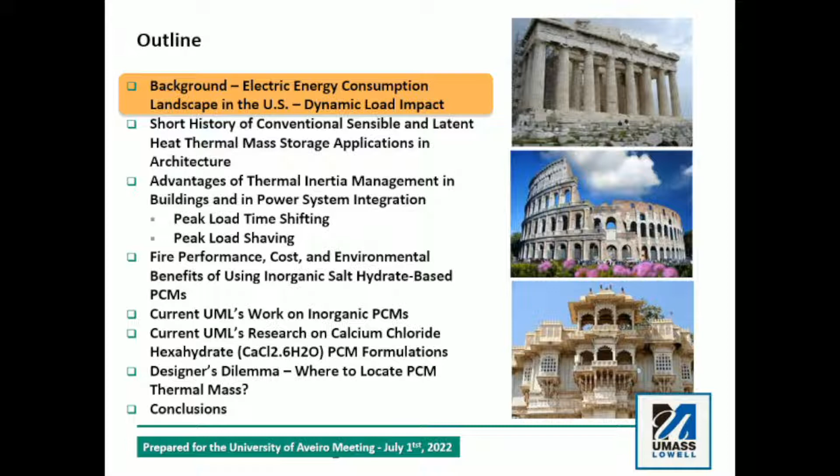Actually, I'll be ready for a couple of questions from you guys, and if somebody is online, we can also entertain questions.

So let's start with the first thing: energy situation in the United States. I don't want you to remember numbers because I'm using both units, imperial units and SI units, and sometimes it may be confusing, so even if I'm giving conversions, don't try to convert numbers, just try to remember proportions.

In North America, I'm talking US and Canada, buildings represent in general 40% plus, building-related construction work is about 6-7%. So we are very close to 50%, or half, of the actual energy consumption in the whole country is associated with buildings. We have industry representing 24%, transportation - lightweight transportation and heavy-duty transportation.

That means it's commercial transportation. Together they represent about 27%. So that's the general portfolio in the United States. Now we have two sectors within buildings: residential building sector and commercial building sector. Residential building sector is about 55%, close to 60%. Commercial building sector is smaller.

If you look right now at the types of energy consumption in the residential sector, you will see that the major component, among several components, is space heating. Then we have water heating, space cooling, and several other small things. And there are others.

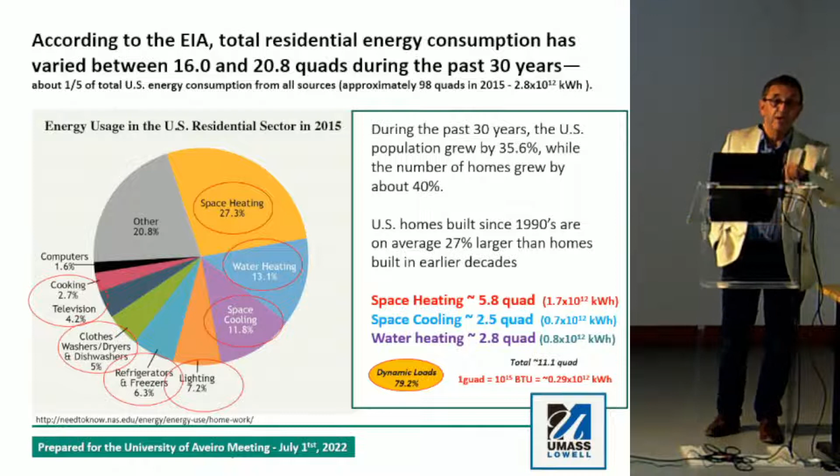If we go to commercial buildings, the picture looks very much similar. We have space heating being the largest one, of course not in Portugal, that's why I said it's a different situation - we're talking about northern countries. And if we go together, we can see that actually dynamic loads are even higher, 87%.

So we have those loads which can be regulated in many ways by thermal mass. Here's another chart showing how loads changed. You can look at that bottom chart, you can see how actually energy consumption, different types of loads, changed between 2003 and 2012. So this is that chart.

You can see that some of them grew up, some of them decreased. For example, space heating was significantly reduced, lighting was significantly reduced, because we came to a new generation of lighting. But some of them, like cooking, cooling, computing power, refrigeration, increased.

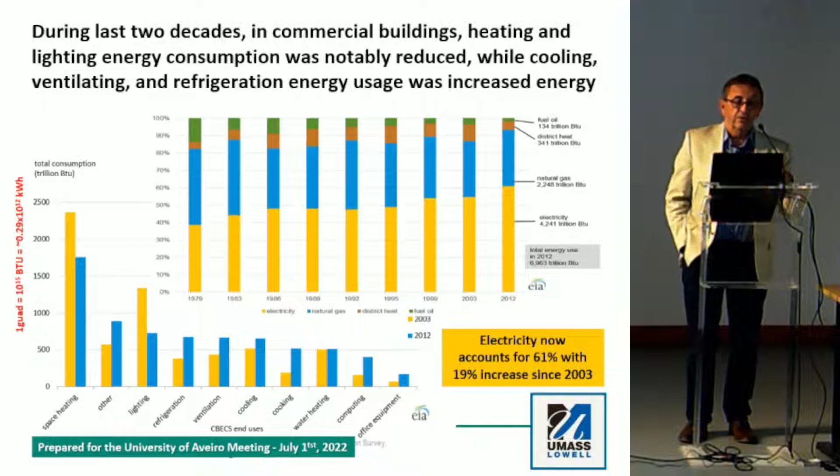So we can see that everything is going up and down, but the biggest loads are going down. Then the top chart is showing the distribution of different sources of energy. The yellow part represents electricity. We can see that it has been growing slowly, but right now we have a very rapid increase because all countries in Europe and North America are looking for electrification. So we will be trying to reduce, for example, gas consumption, coal consumption, other sources of energy through electrification.

But you have to remember, if we go back to the previous chart, the whole renewable energy resources right now are 4 times lower than the dynamic part of energy consumption in buildings. That's the major dynamic part. So this is very important to remember, how big the potential dynamic components in buildings are.

Let's talk about a little bit of history about sensible and latent heat usage in thermal storage in buildings, and why we are using that heat storage. So historically, in the past, it was to provide minimum comfort. We tried to live in just the minimum level of acceptable thermal conditions. Then, when BASF introduced Micronal, people started to talk about PCMs. When in the US people started to do passive solar heating and cooling, we started to talk about energy savings. So that was the second target for the application.

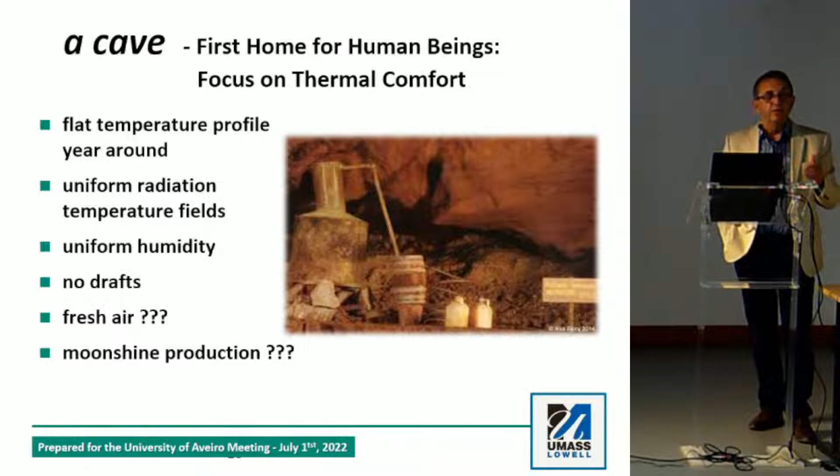And every country has building standards. I've been involved in creating building standards in many different countries around the world. This is something to remember: those standards do not necessarily represent human beings. They represent energy conservation. They represent construction requirements. They represent safety. But when it comes to the question of how human beings will live in those buildings, that question is not necessarily always answered.

And actually, there is an attempt to answer, for example, for average temperature in different rooms, or humidity level, or CO2 emission limits. So there are some attempts.

Okay, so let's talk about thermal mass. A couple examples of completely different technologies in different climatic parts of the world, where people have been using thermal mass. Historically, if we look at the top, we see in ancient times people used a lot of stone in Europe, and also in Asia and Africa people have used a lot of clay structures. And in northern countries, people use solid wood, which works at the same time as insulation and also thermal mass.

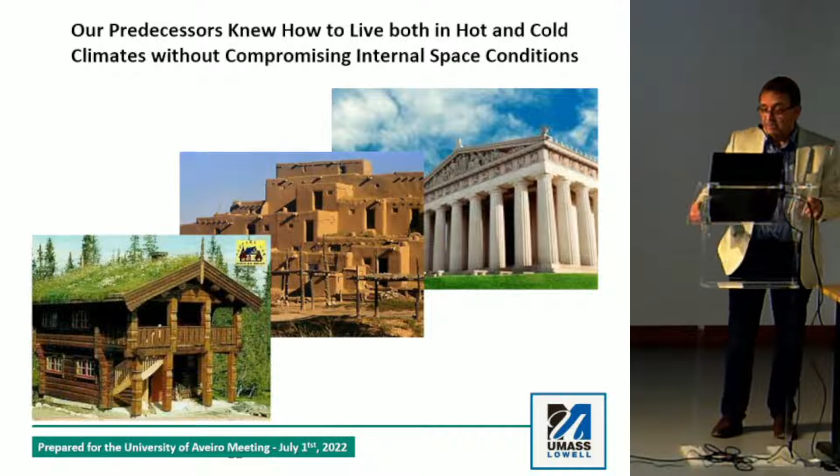Important just to remember the scale, how significant the capabilities of thermal mass in buildings are. I just took the Empire State Building, and I did calculations considering how much structural mass is involved in the building. And I don't want you to remember numbers, just one number. If we assume that all calculations are made for 5 degrees delta T, the Empire State Building is equivalent to 26,400 Tesla Powerwall batteries.

And ask yourself a question right now, how many buildings like this do we have in the United States? How many buildings like this do we have in Europe? This is the huge potential. And ask yourself, is there any company around the world which can produce that amount of batteries to store energy? No way. We don't even have enough lithium around the world. So it's good to realize how big the potential is in good engineering and good management of thermal mass in buildings.

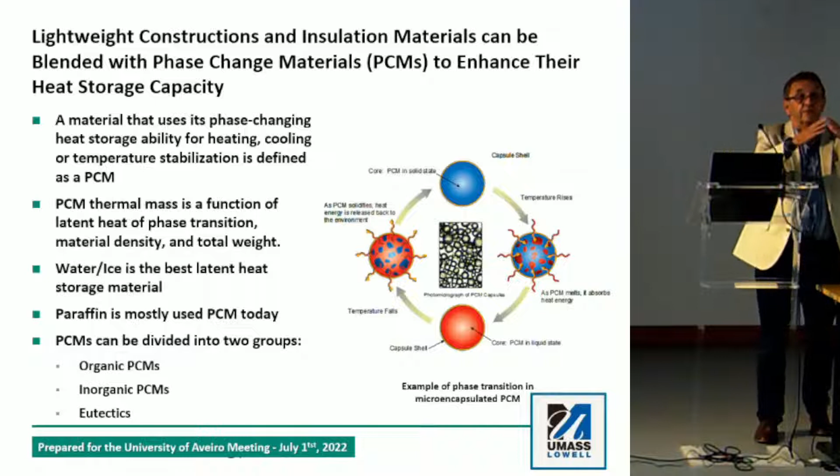In that house, depending on how much thermal mass we have added in phase change materials, we can have a situation that at 10 o'clock, we still don't feel anything. 11 o'clock, we still don't have anything. 12 o'clock, we still don't have anything. The temperature is just as it used to be, 30 degrees, our phase change temperature. For me, normal practice is that system designs like this can easily provide a 4-hour delay in time.

So you can see how big and powerful a technology it is, and you can see how important the technology could be for Portugal. You have a wonderful climate here, with loads going up and down, and temperatures going up and down, and also with loads not going extremely high or extremely low.

So you can use this almost for the entire year, especially, I would say, eliminating heating loads during the winter. Okay, so this is what we talk about PCMs. There are several types of PCM. Water-ice phase change process is the easiest and best recognized by everybody, but we have 3 groups of PCMs. Inorganic PCMs, like salt hydrates. Organic PCMs, waxes and paraffins are a good example, but there are many, many different organic PCMs. And eutectic, different mixtures of the different types of phase change materials.

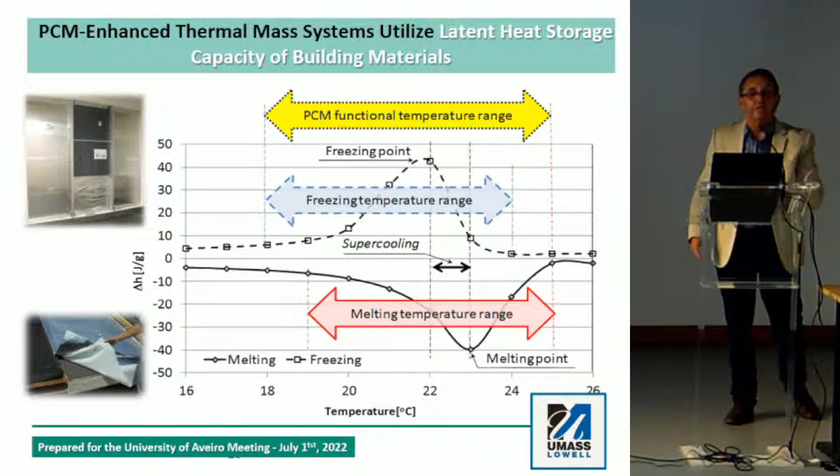Okay, first PCM house. Have you noticed? People have known PCM houses around the world for centuries. The first successful application, not only PCM, but also PCM-enhanced thermal insulation. Beautiful, the best solution for housing in northern climates. This is really the first time people used PCM in architecture. Maria Telkes, in Dover, Massachusetts, in the 1940s, built a house. She was a chemist. And before she started building that house, she checked climate data from Massachusetts.

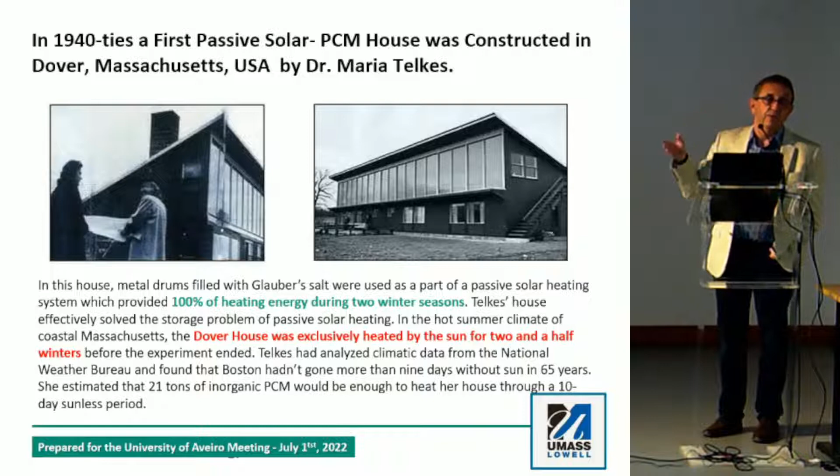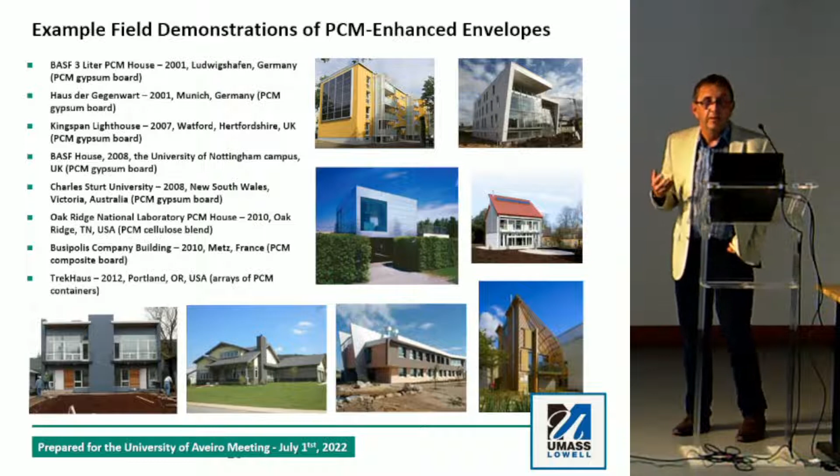I gave a couple examples of the systems using PCM technologies. So there are successful demonstrations. You can see, I think 1, 2, 3, 4, 5, 6. There are applications around the world, Germany, UK. This is the BASF building in Ludwigshafen. This building is a metal structure in France.

This is a German building, one of the first best known German buildings in Munich. This is, I think, the University of Nottingham, lighthouse by Kingspan, also in UK. This is a building built in Australia, PCM. All those buildings are BASF Micronal. And this is the first one.

This is one of my buildings, the first of my buildings, where we can see application of different microencapsulated PCM. And here in this building there is application of cellulose insulation mixed with PCM. Here is the application in the state of Oregon, also PCM provided by Bio PCM, North Carolina PCM.

So let's talk about advantages of thermal inertia management in buildings and in power systems. So historically, we use thermal mass to stabilize interior space temperature, improve thermal comfort. That's mostly comfort-related application. Now, today, there's a different function related with thermal load management, and we're talking about, of course, summer loads, cooling load, and heating loads during the winter time.

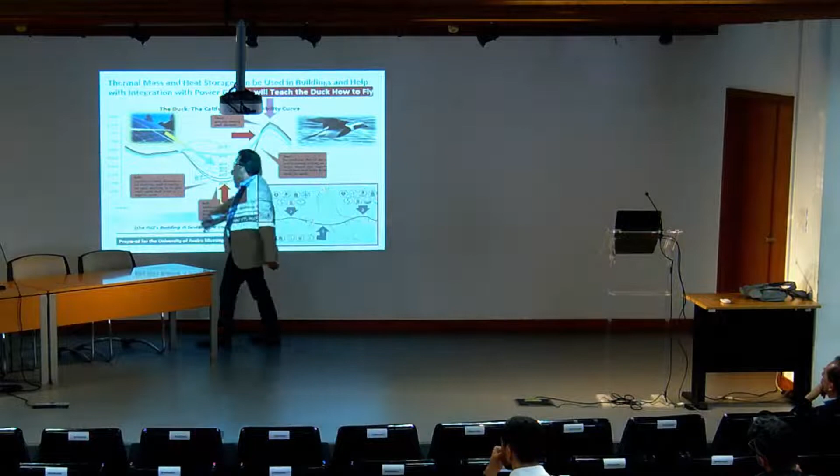This is how everything's starting to look like. And actually, we call this in the US the duck chart. And in most civilized countries, that duck chart looks very much the same. This is energy consumption along the day by the building sector. For residential buildings or commercial buildings, it can be a little bit different, but not necessarily much different. And you can see that it looks like a duck, yes, a sitting duck.

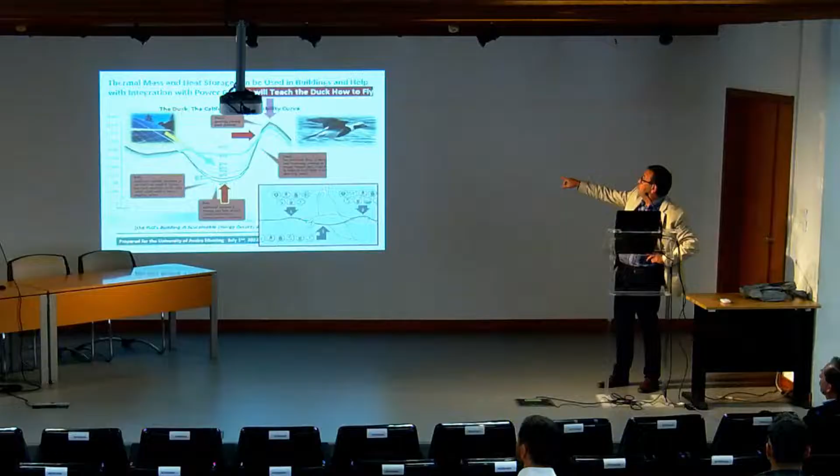Now, if you see that light blue line going, this is a typical building. We have two peaks, early morning peak, about 7 o'clock, 8 o'clock, a little bit of energy consumption coming up. And then we have continuous energy draw by the building sector, and then we have a huge peak in the afternoon hours, correct? This is important to remember, that actually if we get to that peak solar part, we have negative energy, yes, going to the grid. So we have that belly growing. More solar, we have that belly growing.

And we are getting to the point that actually we have to start shutting down power plants. You know, you cannot shut a power plant because power plants are designed for specific capacity. And if you shut down power plants, it takes sometimes a week or two to make sure that you will be able to put this back in operation. So in that situation, you have to make sure that that belly is as small as possible, correct?

The second information you need to know is that actually the optimum situation in load distribution will be that flying duck. You see how loads are looking? All that chart is very much flattened. It can be achieved just by superposition of several effects, and one of the effects is energy efficiency. So energy efficiency just reduces all those parts a little bit.

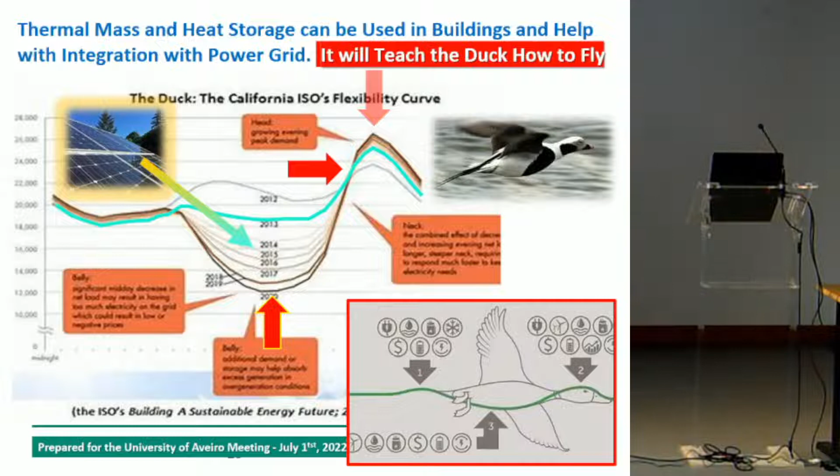If that balance is not operational, manageable, the country can actually, especially with coming loads, we imagine there is a prediction that now the peak loads for buildings can be a couple hundred percent higher. And we will need to find the way to react to those loads. It is not easy to add that much capacity of power production or power transmission in any country. It will have to be a worldwide revolution, building power plants everywhere and building transmission lines.

It will never happen. So if we stay where we are right now with current understanding of thermal mass, thermal management, and energy dynamic management, we will end up in a situation that that part will be eliminated. What does it mean? Solar power will not be able to demonstrate its capability, use its capability. And what does it mean? That we still will depend more and more on the conventional sources of energy. So the only way to move on from coal, oil, gas to a new generation of energy is to understand those processes and to make those processes manageable.

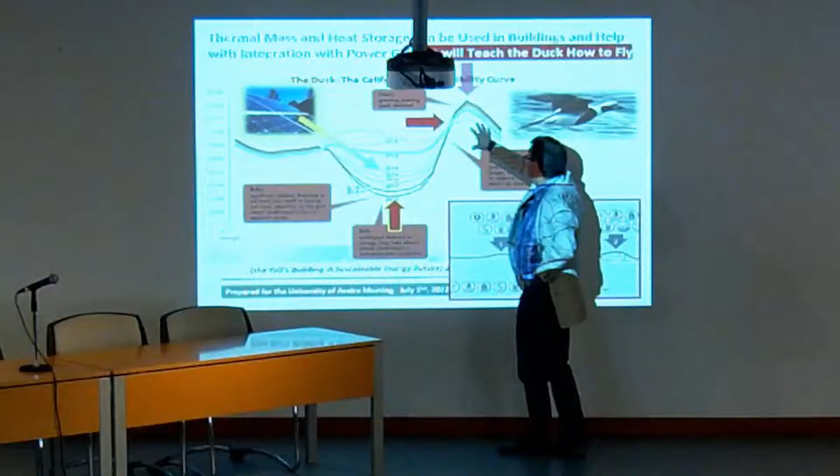This is like opening the door. This is the just condition. People don't understand. We can build a lot of plants, but still we will have those peak loads. And we are not able to build the power generation and power transmission industry to the point that we'll be able to supply a couple hundred percent larger peak loads.

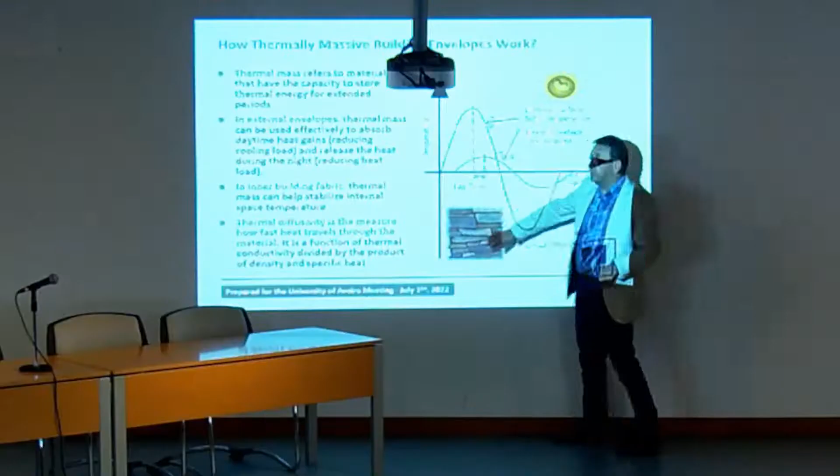Okay, let's go to the thermal mass. How thermal mass works in buildings, just to make sure that we have tools to operate that whole system. If we have daily thermal energy, this is thermal excitation coming to the building mostly from the sun and temperature swings. That excitation is usually transmitted through the building envelope, through the roof, through the walls, and depends on how much thermal mass we have in the wall. That whole transmitted line can look completely different. We call this thermal damping, and we call this thermal lag.

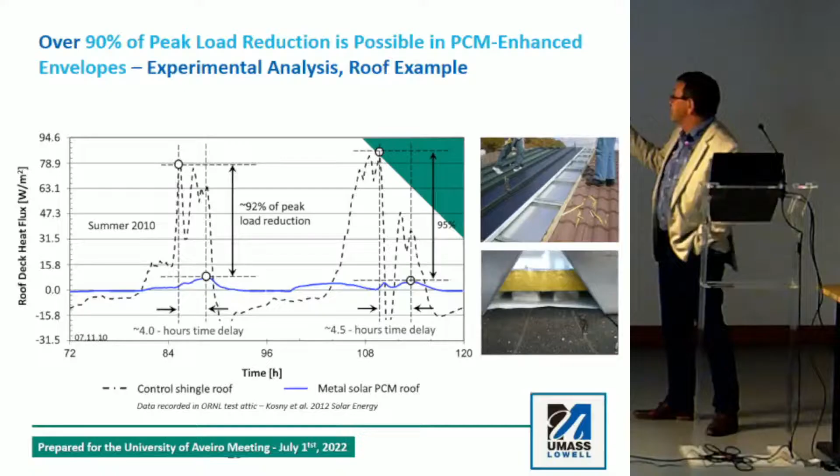That means that the peak we can see on the internal side of the external wall is at a different time than this peak, which is on the external wall. And we can see that actually there's a significant reduction in amplitude. This is an example of how it can be manageable. And this is one of my experiments. Some of you can recognize PCM used here. This is the roof, conventional roof. You can see that line here.

This is the temperature underneath the roof. And actually this is the heat flux under the roof. And this is the heat flux under the PCM roof, advanced roof. You have a conventional roof, the same R-value, the same thermal properties. The same roofs follow standard requirements. Everything is the same except that the other roof has a special dynamic design. Load has been reduced 92%. Peak load, actually, at this moment is 95, but total load is reduced about 60–70%.

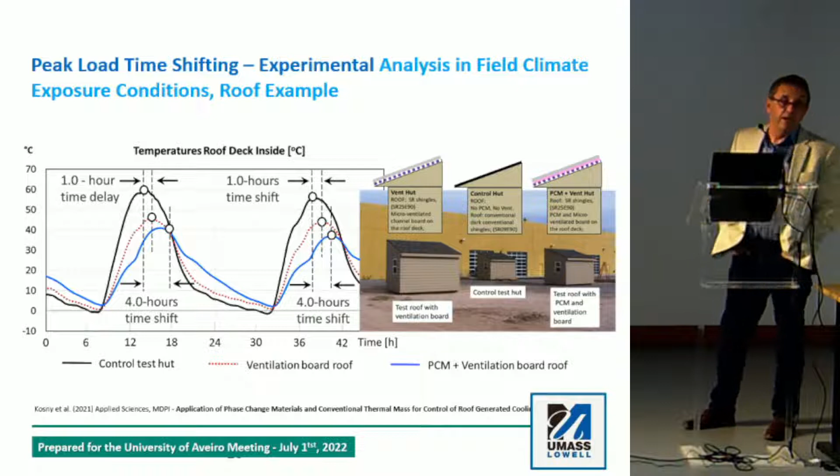Another example. This is something I should actually show to our colleagues from Saint-Gobain. This is one of the systems which I designed for Saint-Gobain. And we have three roofs.

Conventional roof, roof with special thermal break system with ventilation cavity, and the roof with PCM system. You can see that you can achieve a lot with no PCM design. This is the reduction of the peak. This is the PCM extra part.

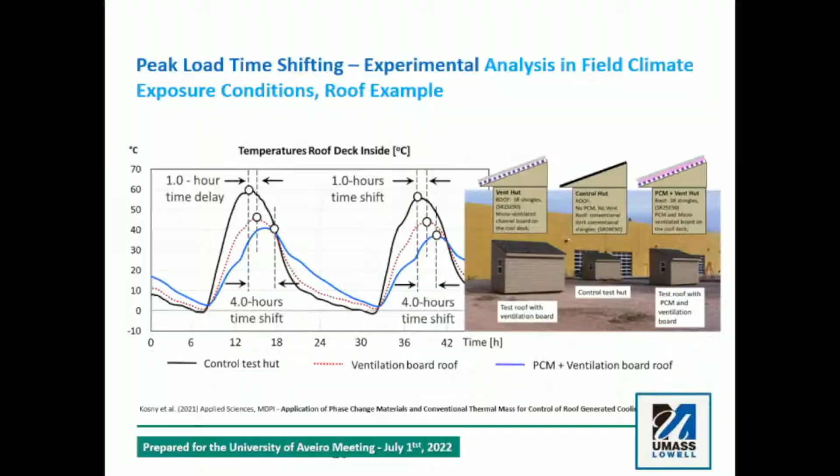And with PCM you can get this very important information: shift in time. I would like you to remember, with envelope, shifting in time four hours is something which should be called achievable. I can achieve also 8 hours, I can even go over 8 hours. But this is something which is achievable. And you can achieve this in walls, you can achieve this in roof.

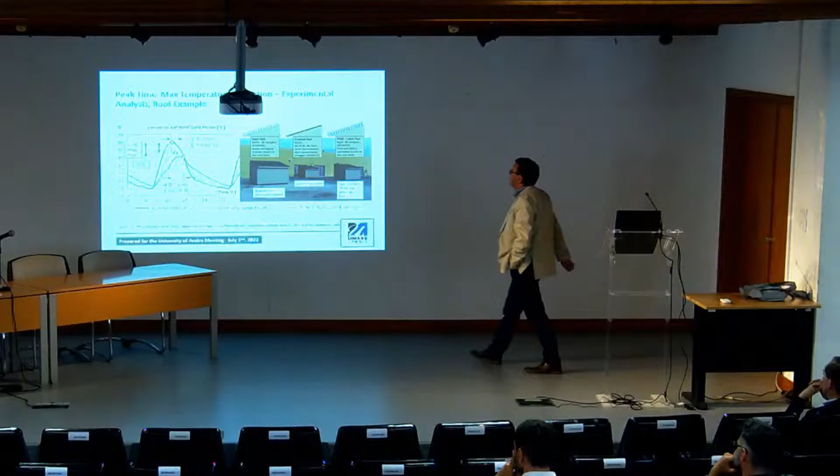This is another example, and we talk about time delay. It's another shift and temperature reduction. You can see how different the temperature is in those roofs. Here it's about 60 degrees Celsius, and the PCM roof has 40 degrees Celsius, so it's about 20 degrees reduction.

Imagine in your houses, you live on the 4th floor, on top of you there is a roof insulation, and it's very unpleasant living there during some days. I know this because that was my college time, I lived in the dormitory on the 4th floor. Summer was not a pleasant time.

So you can reduce this time. This is something I'm just appealing to you guys as engineers. You don't have to remember those designs. I would like to make sure that you keep in mind that this is doable. That's all, you will figure out a better way. I'm just giving a couple examples.

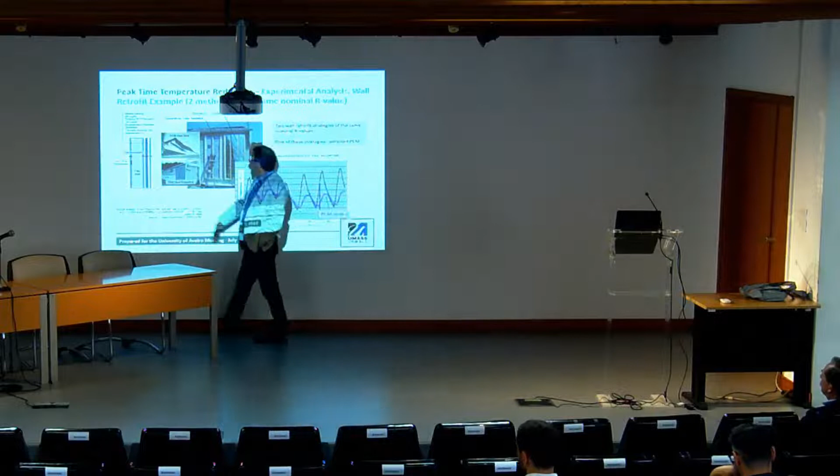This is the tricky thing for wall insulation. That system has been designed for Florida, for just concrete masonry wall. So this is just part of the masonry wall here, CMU wall. Nothing different than you guys have here.

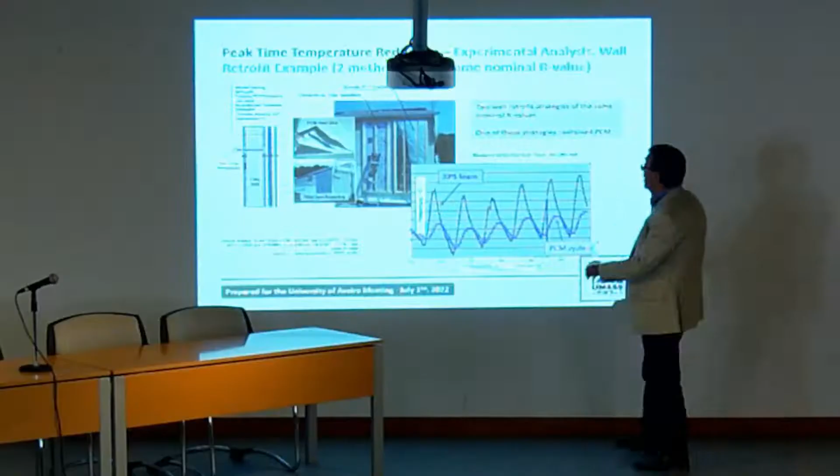And then on top of this, we designed two systems. This is a typical system using plastic foam insulation, which people have been using everywhere. And this is a system using phase change material with some kind of different tricky configuration, where both systems have the same R value, so I was adding the same amount of material to the wall. Cost was comparable. Believe me, this is nothing fancy, not like a spaceship material.

Everything is just almost everyday usage. Actually, here we use PCM which has been used by one of the companies for clothing. I didn't have different other sources, and I needed several temperature ranges, so we used that material. And you know what happened?

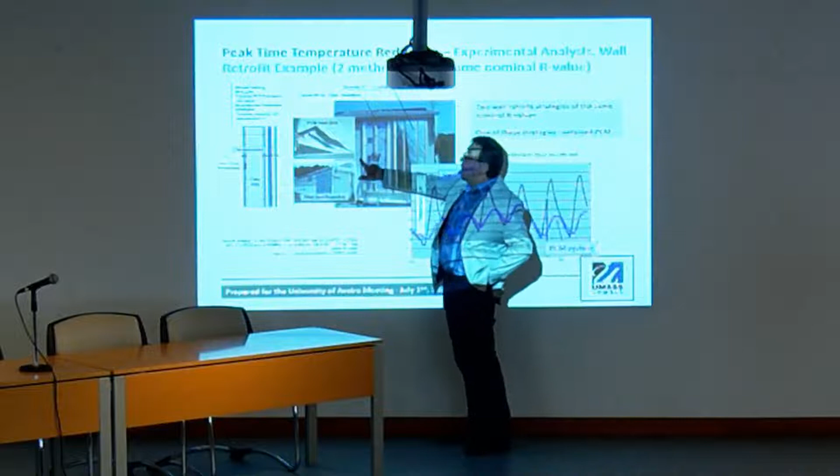We measured temperature on the concrete behind the insulation in both cases. This is the temperature of the conventional part of the wall, and this is the temperature on the PCM insulation. You can ask yourself how big the difference is, and it is very significant. This is like 70... let's see, 76 to, I think it's 70, 80, 90. So it's about 15 degrees.

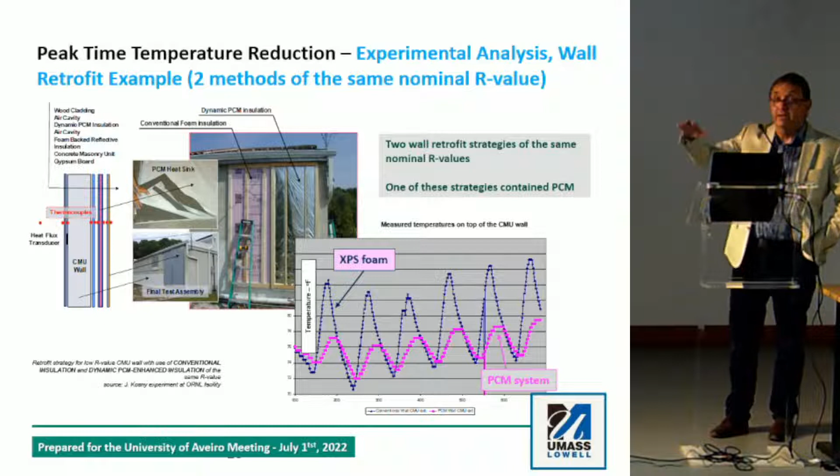Again, it's achievable, that part of advanced thermal insulation is achievable. And this is great, I'm showing this for you guys because you have a different climate than what I have in Florida. In Florida, temperature is sitting during the summer very much at one point. You guys have temperature going up and down, wonderful for using phase change materials and thermal mass.

Okay, so let's move on. We did a lot of experiments, but we also did a lot of calculations. This is one of the examples of calculations. You can see that you can consider, let's assume that this is a sol-air temperature.

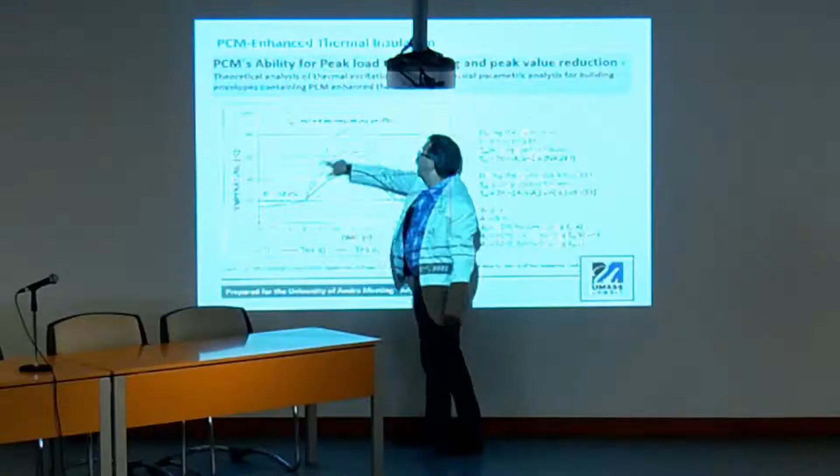You know what sol-air temperature is, when you add the component coming from air temperature and solar temperature. We created that sol-air temperature that represents external temperature of the wall under the sun. So you may have an extreme sun situation, quite a big peak during the day, or not so big a peak. So we did 3 scenarios during the day, showing the temperature of the wall during the day.

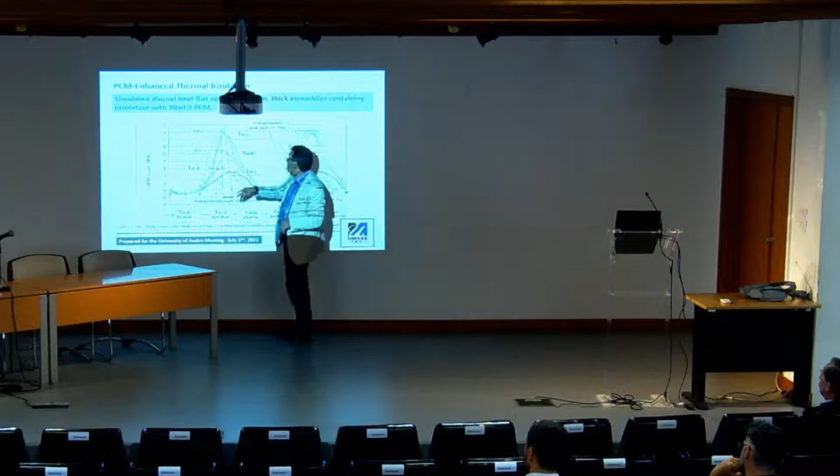We have here an example of 3 types of insulation, all of them 14 centimeters thick at the level of insulation, mixed with PCM, considering 30% of microencapsulated PCM. So this is fiber insulation, could be fiberglass, could be cellulose, could be something else, mixed, or can be foam, mixed with 30% of the PCM. Then that dotted line represents a scenario, this is the largest peak, that orange is just the medium peak what you saw in the previous slide, and this is the small peak.

You could see that we have a significant shift in time. The solid line represents the scenario when we use PCM, the dotted line is no PCM, just insulation. So you have non-PCM, PCM, non-PCM, PCM, non-PCM, PCM. Do you understand this chart right now? Each scenario on those excitations is represented with two parts of the configuration.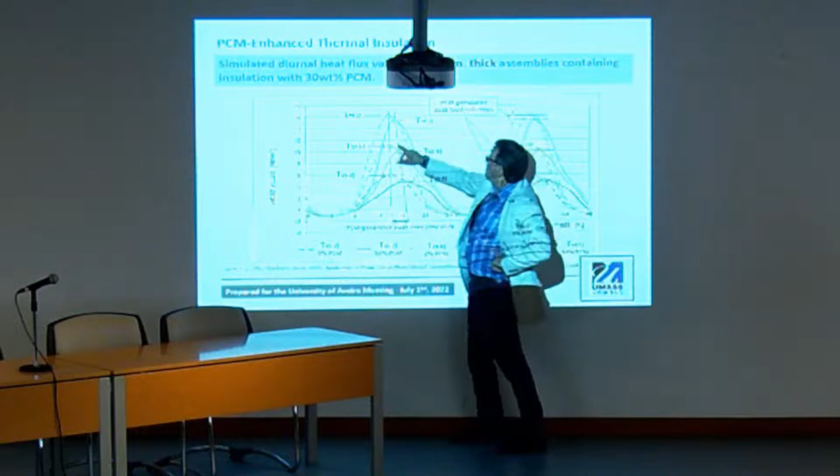You can see that in each part there is a significant shift in time, and significant reduction. With higher excitation, you have higher temperature increase with a lower thermal effect—simply you don't have enough PCM. So you will have to add PCM, and you will see this on the next chart. But if you have lower thermal excitation, you have a more significant effect.

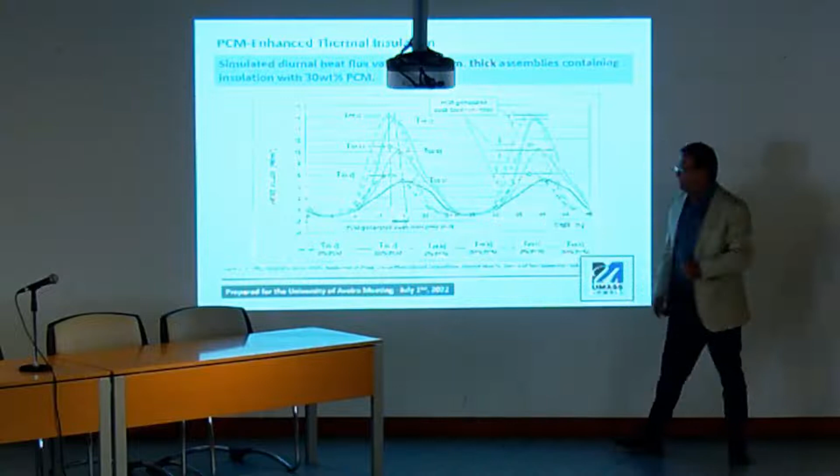So this is for something which is 14 centimeters thick. This one is 30 centimeters thick, for roofing insulation. You could see that the impact is much more significant—impact showing how big it is. Here is material without PCM, material with PCM. We have significant reduction of the load and significant time shifting.

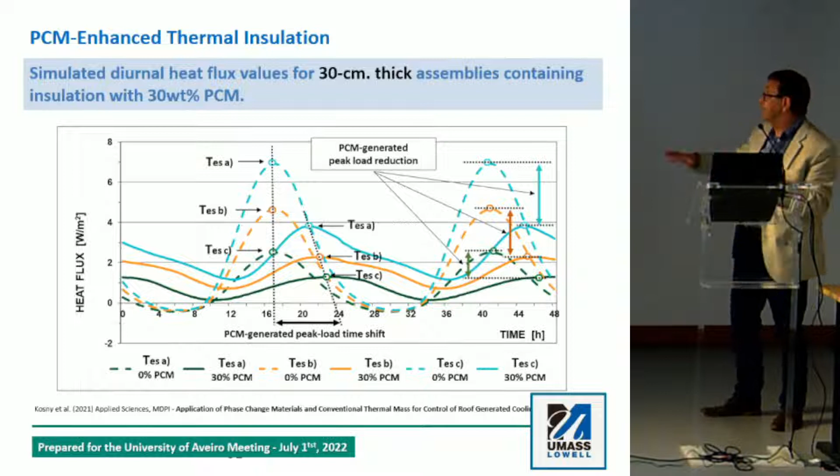It's good to remember that I have a lot of colleagues who say that phase change material has to be associated with a highly conductive environment, just to provide rapid accumulation of heat. That's correct—I call these fast systems. You need those fast systems in electronics, in some building applications, in military, batteries, automobiles. But in buildings, when we're trying to manipulate peak load times, we need slow systems. That's why people don't understand that if you add insulation with thermal mass, you create an extremely slow system. You'll see how slow on the next chart.

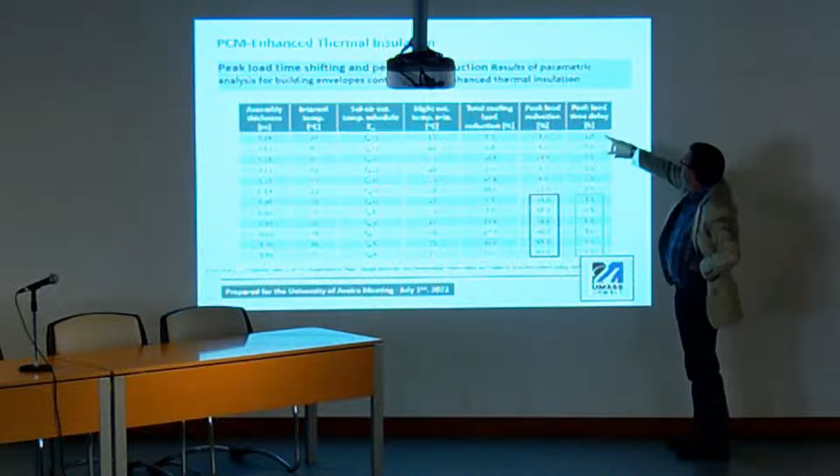I put just those peak loads for the 14 centimeter system and 30 centimeter system, and marked those numbers—this is peak load reduction percentage and peak time delay. You can see that easily you can go 3 hours, 6 hours, 6.5 hours of time shift, so it's doable. The only thing you need is enough insulation capability and enough PCM, enough thermal storage—those are the two important things in design. If you have enough, thickness is just a function of how insulated the material is, so you may have super insulation which will be much thinner.

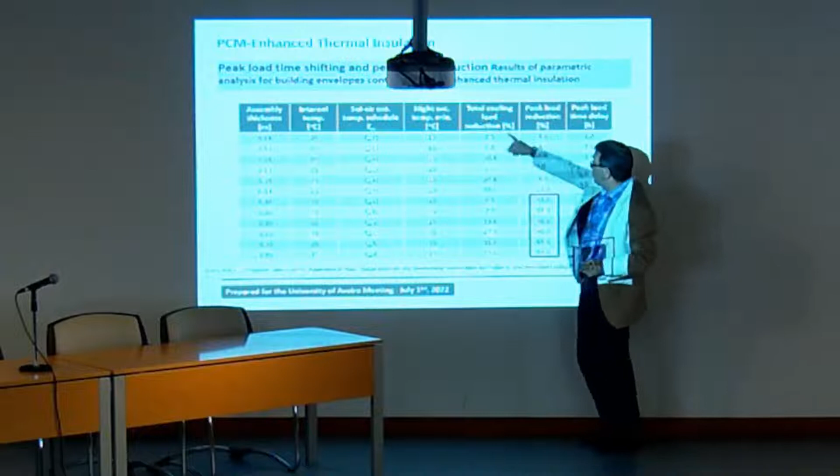When it comes to total load reduction, you can see that for these systems you can reach even 70%. I would say it's safer to say 30% load reduction in general.

Fire performance, cost, environmental benefit, and some other benefits of using inorganic material versus organic material. First, it's almost impossible to ignite salt hydrates, so that's good to remember—most inorganic materials are very difficult to ignite.

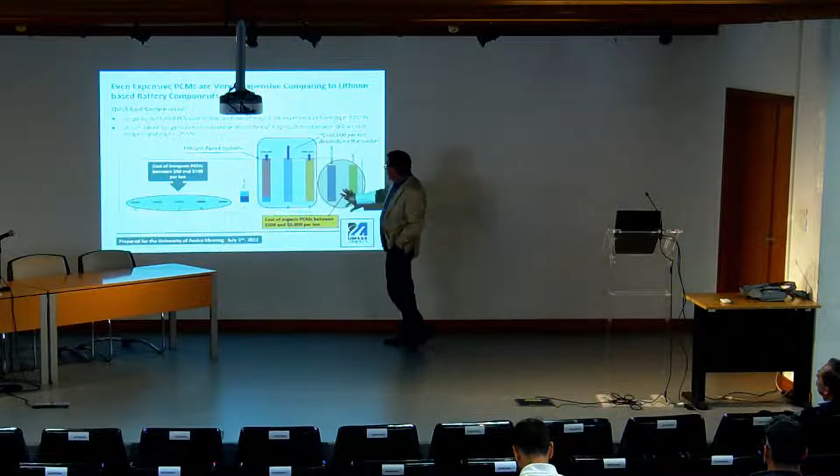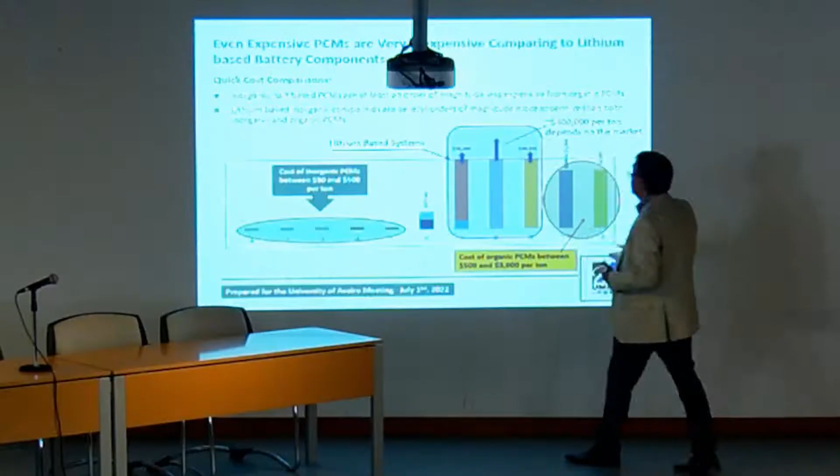That's the first example—actually the second advantage after fire. I tried to put this on a scale: these are the inorganic salt hydrate-based PCMs here, you barely see them. These are organic PCMs, you can see them better. And this is the whole cost of the lithium-based PCMs—I put three formulations of different types of lithium-based PCMs. You see how big the scale is.

I would like to talk a little bit about lithium. The cost per ton for getting lithium compounds is about $20,000 per ton, and this is not today's price, it was priced from 2 years ago. The price is moving very fast. International assumption is that the cost of energy stored in lithium-based systems is about $273 per kilowatt hour, accepted internationally based on one of the United Nations programs research.

Here we have the US DOE price target ceiling for PCMs, and this target is $15 per kilowatt hour, for general PCMs, organic and inorganic, versus $270. That's the difference in prices.

Now remember about the lithium thing. It takes about 1,900 tons of water to extract lithium compounds. We're talking about Chile, Bolivia, and those countries being converted into deserts, salty deserts, because when we produce lithium we also produce tons of brine, which is drying. So we take water from whole resources around, and those countries are already scarce in water. This is good to remember.

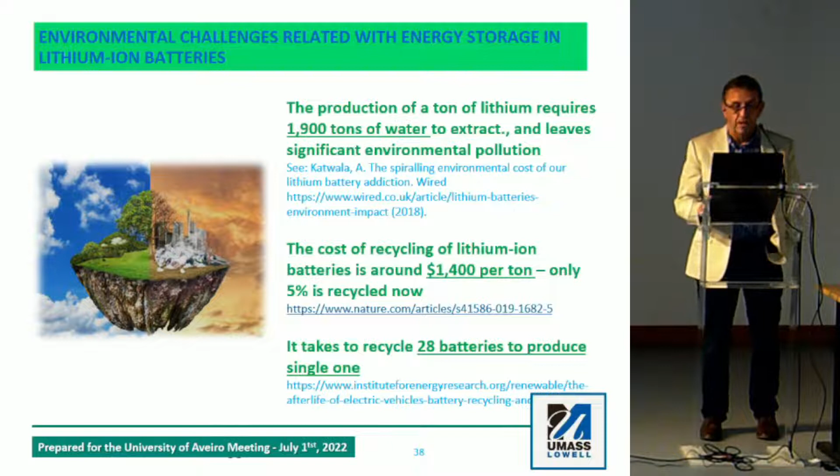Another thing is, when somebody says okay, we can recycle all the batteries to get lithium - yes we can do this, but it takes 28 batteries to recycle into one. So that's the reality, and that's the compatibility.

And if you remember that Empire State Building which I showed before, this should show the capability of how much we can help the environment.

Another one, recyclability. It takes about 60 cents or $25 per ton to recycle different types of concrete structures - that's US, this is California type of evaluation. Then it takes $24 per ton to recycle building waste, so if you crush a building, demolish a building, you take this and recycle it, it takes about $24 per ton. If we take PCMs, wood is also about $24 per ton. If we take paraffinic PCMs, the only thing is you need to take it and convert it into new products, so there's almost no cost for recovery, just cost for producing the new product.

If we take lithium chemicals, it's about $1,000 to $2,000 per ton for recycling. When it comes to batteries, some countries are talking about having programs already for recycling batteries. I think about 5% of batteries worldwide are being recycled right now, and most countries are saying openly that so far that process is uneconomical. So there is no economic justification to make businesses based on recycling - everything has to go under some kind of donation, some kind of subsidies.

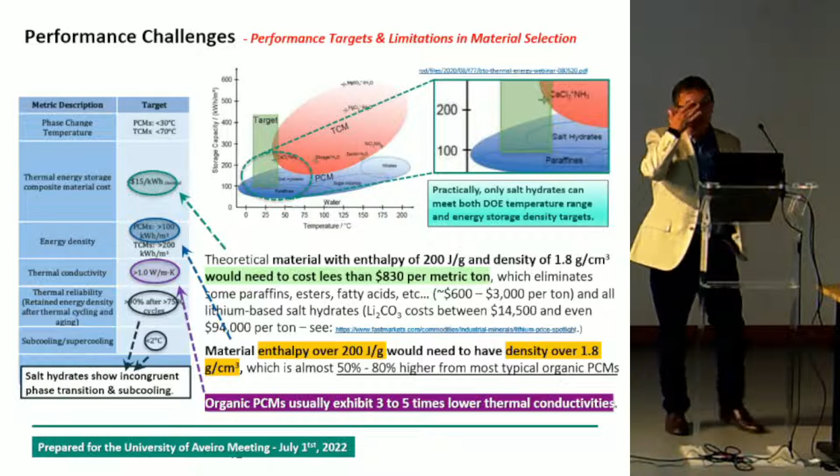Here's a couple of slides I put together just for you, to realize what are the requirements for PCM and how difficult it is to meet some requirements with organic PCMs. First one is price, $15 per kilowatt hour - it eliminates everything which is of higher cost or lower density. Then the second, energy density - we talk about 100 kilowatt hours per cubic meter, so it's a volumetric energy density.

Then thermal conductivity of material, about 1 watt per meter Kelvin. It's good to realize that most inorganic PCMs' conductivity is 1.2 to 1.4, 1.5. Organic PCMs are 0.2, so they are 4 or 5 times less conductive.

Then an important fact is thermal durability - that means we need a number of cycles, freezing, thawing, freezing, thawing, without losing enthalpy. Organic PCMs are much better here, they can do millions of cycles without losing capability.

Another thing is subcooling, which is supposed to be at least below 2 degrees. I have colleagues from industry telling me they will never produce material with subcooling higher than 1 degree. Some people working here with different inorganic PCMs say they never saw subcooling so low for inorganic PCMs produced by one of the European manufacturers. I agree, and if you put those numbers together, you will see it's extremely difficult to meet that criteria with organic PCMs.

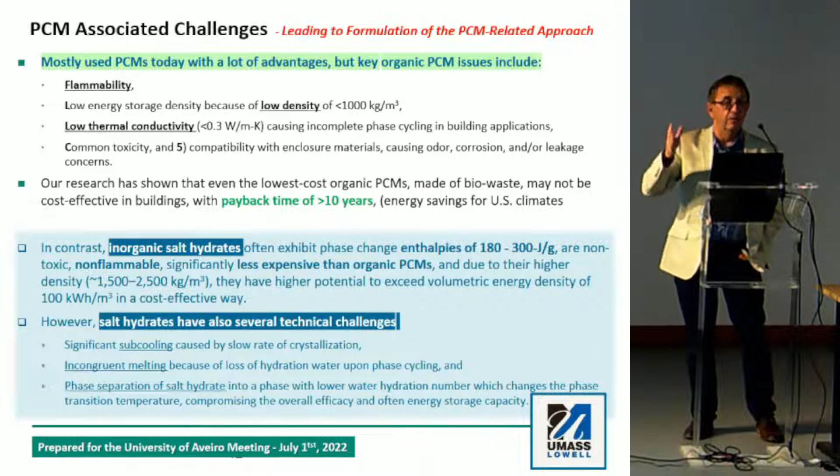Now, I would like to follow on this difference between organic and inorganic PCMs, and I have on top organic PCMs. So organic PCMs are extremely good when it comes to durability. They can work and work. They don't have issues with subcooling, but they are flammable. People are saying, okay, they're not flammable, we can put fire retardant. Yes, but fire retardancy is not that easy to do, and actually China is a very good example.

If you add fire retardancy, during the fire situation you don't have much of the fire, you don't have ignition, but you will have a lot of smoke. And people are not killed in fires by the flame. People are killed in fires by just breathing the smoke.

That's major. And another one, thermal conductivity, too low thermal conductivity. So that material is difficult to use really in a serious way in buildings. And actually, this is explanation one. We have so many projects around the world, and so many proud architects who said, okay, I implemented PCM for the first time in Guyana somewhere, and then it happens that actually that material doesn't work.

And with inorganic materials, we have significantly higher energy density because we have material density like 2, sometimes 4, sometimes 5 times higher. And we have material of higher thermal conductivity. Major problem is that it is difficult to have good durability. And we have subcooling, incongruent melting process, and phase separation, which is a challenge for engineers, but I would like to show you in the next slides that it is achievable.

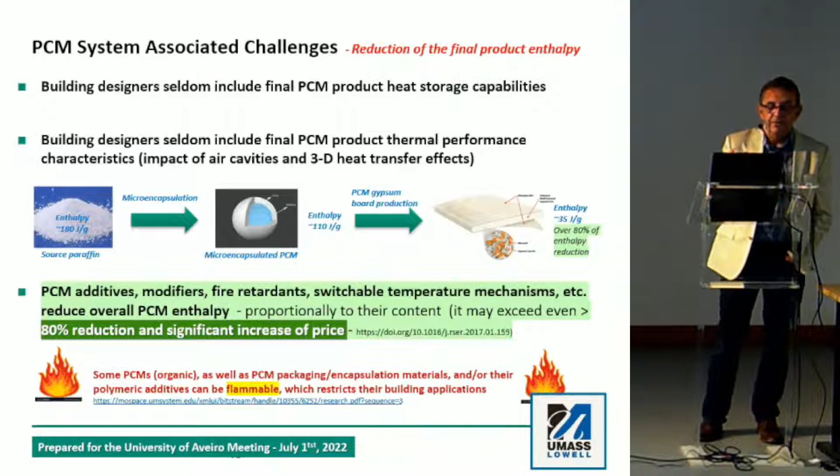And this is another important fact when it comes to designing PCMs, because a lot of people don't understand that the more we are adding to that PCM, the less enthalpy we will have at the end. So I gave an example with Micronal, with enthalpy about 180 joules per gram, which is paraffin. Then we convert this into microencapsulated material, and that conversion reduces enthalpy from 180 to 110. And then we try to use this material as a part of gypsum board or concrete or something else, and final enthalpy is about 35 per gram.

So if you add this to concrete, which has enough thermal storage capacity, you will not even see the effect of the addition of thermal mass. So this is good to realize, because some people may say, okay, PCM doesn't work in my concrete structure. How much do you add? 5%. Okay.

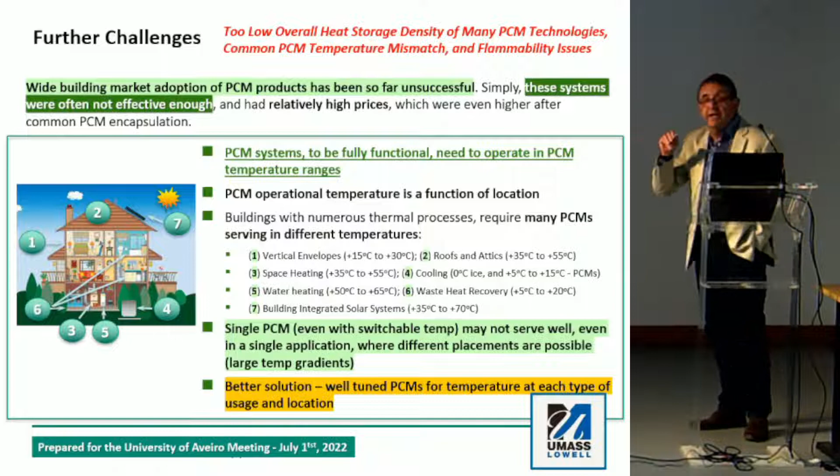And this is the first thing designers should know. Okay, I will place my PCM on the roof, so I need to know that roofs and attics require PCM of 35 degrees to 55 degrees. So this is what I should start looking for. Then we need to go to real engineering work. Take a computer model, design that whole system.

See what is the temperature fluctuation in this specific point, and then, if you remember my slide with those arrows, the temperature band, operational temperature for PCM, you need to put that operational temperature against the real temperature in that place. This should happen. I bet that happened in less than 10% of projects so far around the world. The other projects were just designed by a PCM strategy. And that's the explanation why so many projects are not working correctly around the world.

This chart is specifically dedicated to our approach in my team, and it comes from my several decades of experience working with PCMs. We are not working only on PCMs. We have a holistic approach. So this is the PCM part, but we also work on the system part. You will need different PCMs for different systems. So you need to combine that, and it has to include the formulation-related chemistry part and the durability part.

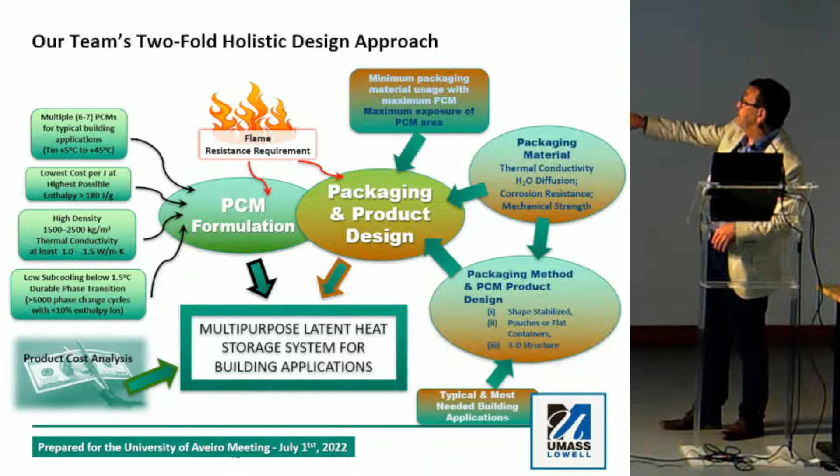Then you have to go to what we have on the bottom left side, cost analysis. Because if we design, and I'm talking to you as part of academia, those people who will be developing those formulations, industry will never adopt a system which will not go through a positive product cost analysis. You may have a wonderful system based on lithium compounds, and you will see that industry will say no, no, no.

So that's one thing. The second thing is that you have to design the system which will carry that PCM. And we have several strategies. We can shape-stabilize material, for example, foam mixed with polymeric material mixed with PCMs. We can have arrays of pouches or containers, or we can have three-dimensional structures. There are many different opportunities, but you have to remember, the system has to be designed to carry the PCM, not just a PCM. That alone is not a solution, and it is the first recipe for failure of the system in building design.

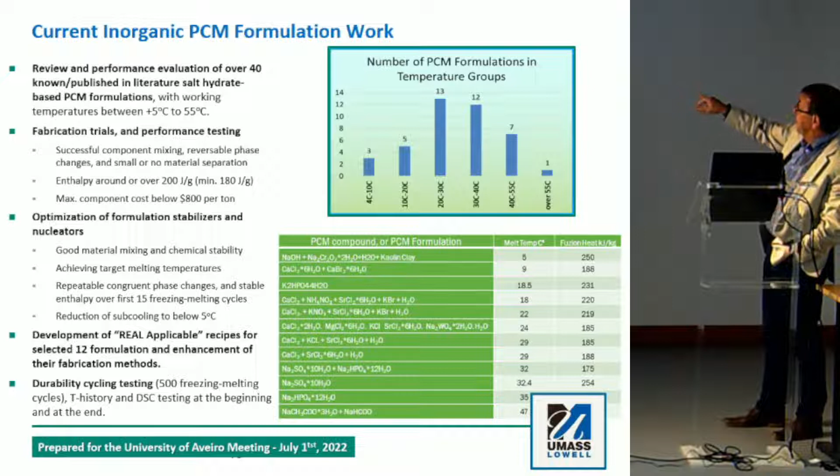We work on numbers. I said I have several sponsors, and this is that group of technologies. We have 3 PCMs from 4 to 10 degrees, 5 PCM formulations from 10 to 20, 20 to 30, and these are the most typical applications. So we have a number of PCMs, and that number is growing significantly right now, specifically in this region, because that region is very important for batteries to work, and I have several projects related to batteries.

This is the list of the most typical formulations my team is working on. And you have enthalpy here, and temperature. Some of the formulations were really completed to the point that we can pass them to industry. With some of them, we are not very happy with the results.

When it comes to instrumental and test analysis, number one is DSC. Remember, DSC is for very small samples. If you go into serious DSC analysis, you have to go through the history of testing PCMs with DSC, because DSC was not developed for testing PCMs. Those methodologies were developed for analysis of polymers and different biochemicals. So you have to remember two different methods.

The step method of DSC testing, that's number one, which is the most important, because if you do the industrial way of DSC testing, you will end up with a lot of fake effects. So you may say, okay, my material is not even melting. If you follow industrial procedures for DSC testing, that's the risk. You have to follow what other people have been doing for decades, trying to learn how to test PCMs. And there's the oscillating procedure and the step procedure for testing. I'm just giving examples of how important understanding DSC testing is.

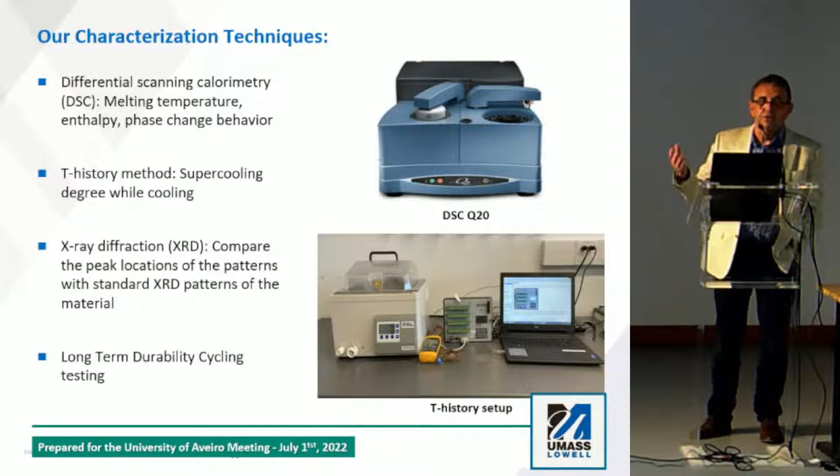Second, a very easy method, and I spoke with my colleagues yesterday about how to build a T-history apparatus. It looks like they have everything, so they will be able to put it together within a month. It's good for subcooling analysis, but you can also estimate the enthalpy. Here is an example of why DSC is so important.

I call DSC testing initial testing. Before you go into more detailed analysis, you need to know at least what you have in hand. So you need to know your peak point on melting, for example, and you need to know the spread of the enthalpy curve, because this will help you design other experiments. And that's how important it is.

It's important in the case of inorganic PCMs. You do DSC for the material, and this is a beautiful chart. You have one peak, but very often the situation is that you are looking for one hydrate number, here a hexahydrate, and what you have here is a tetrahydrate showing up.

And that tetrahydrate is just taking a lot of energy. Your process is here, so you need to have all storage available here in this area. Unfortunately, that storage is here. So that means that your PCM doesn't work too well.

And this is a very common situation in the development of formulations, because those hydrates are showing activity based on some kind of nucleation sources. Sometimes you are adding either some material which will stabilize the PCM, or densification material, or some other components. And actually, this will also be a nucleation source for that extra hydrate, and it screws up the whole thing.

Another very important factor, which I was told by industry many times: Jan, don't work with those crazy scientists. When I was director of the PCM industry, insulation industry, they told me that, because they work on super pure materials. They have super distilled deionized water, super pure chemicals, which are completely unacceptable because sometimes they're 100 times more expensive than industry grade, commercial grade chemicals. And if you have those materials, you will have completely different chemistry.

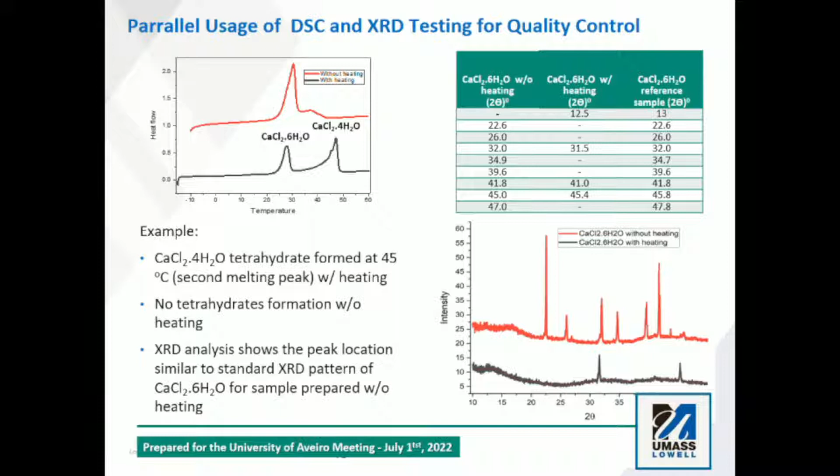We are talking about the small pieces, we call them seeds for nucleation, which can affect the whole number of different hydrates showing up, or going into some chemical reactions which are unnecessary. We like them during the process of making PCM, going from the frozen element to melted element and frozen again. My colleagues from MIT are saying that they're working on crystals.

They grow big crystals, and they say you have to be extremely lucky and extremely knowledgeable to grow a crystal. We grow crystals in inorganic PCMs several times during the day. We need to be sure that that crystal will grow, not dissolve, nor decompose. So you see the scale, how knowledgeable and experienced you have to be to be able to design those systems.

Another important fact is that we are using XRD analysis. This is a very important piece of the experimental testing equipment we have been using. Why? Because with XRD, we can see if we have some extra reactions going on. So we can check: we added that additive to the PCM formulation, and that additive works well. Here's what we have, but we have several pieces showing up in different places.

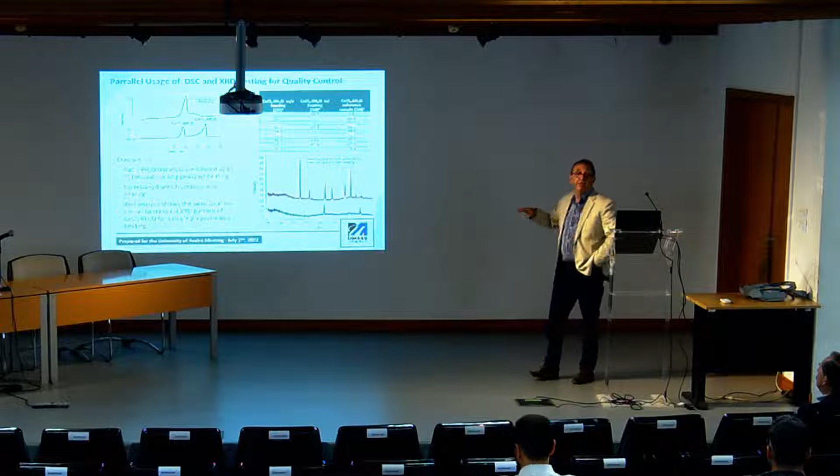So this is something we need to know, and for a formulation to be called successful, it goes through a very rigorous number of tests. And you can see there's a lot of chemistry in this whole thing, physical chemistry. Example of the T-history analysis. We discussed the chart yesterday with my colleagues. So we have several PCMs under cycling.

What do I mean? There are a lot of papers around the world where people are saying, I developed a wonderful formulation: that much of this, that much of this. You mix this, you add something, and this is a beautiful formulation. Enthalpy is 300 joules per gram. You try to reproduce that formulation, and most often you are not even able to, for one reason. You don't know what kind of chemicals those people are using. They may have different water, a different source of the chemicals.

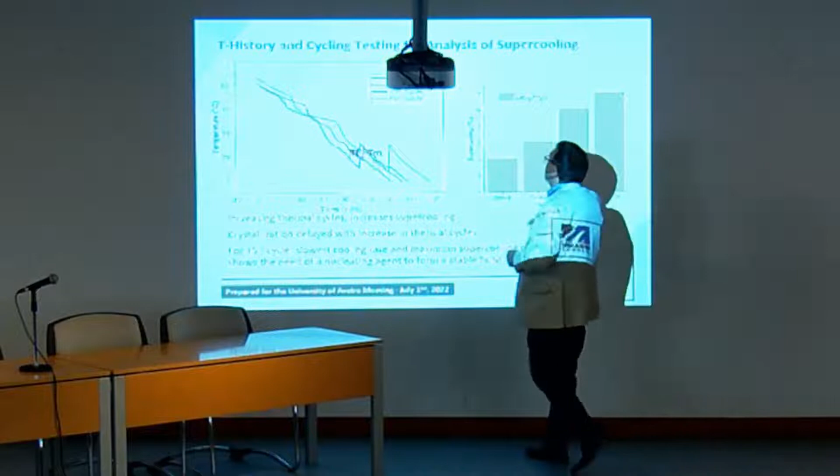But even if you are reproducing that formulation, you do cycling. And you figure out that after the 5th cycle, you don't have 300 joules per gram of enthalpy anymore, you have somewhere around 150. Then you go another 10 cycles, and you have something like 170. This is going up and down. So it is important to understand those formulations.

The second thing is, it's important to avoid formulations which have enthalpy starting from a very high level and then going rapidly down. There are a lot of formulations like this which work for like 30 cycles, and that's all, and then they disintegrate. Usually in the initial work before we go to industry, we go through 30 or 50 cycles with the analysis. If we go into serious development, we go into 500, 1,000, and 2,000 cycles.

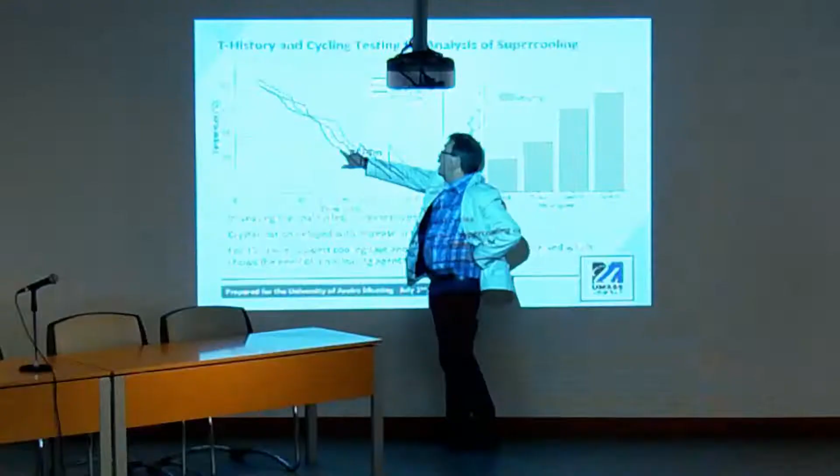And usually, after 50 cycles, we do DSC analysis. After 100, 200, we periodically take material and do DSC analysis. For what? This is another important fact. The T-history testing is showing us what the subcooling effect is.

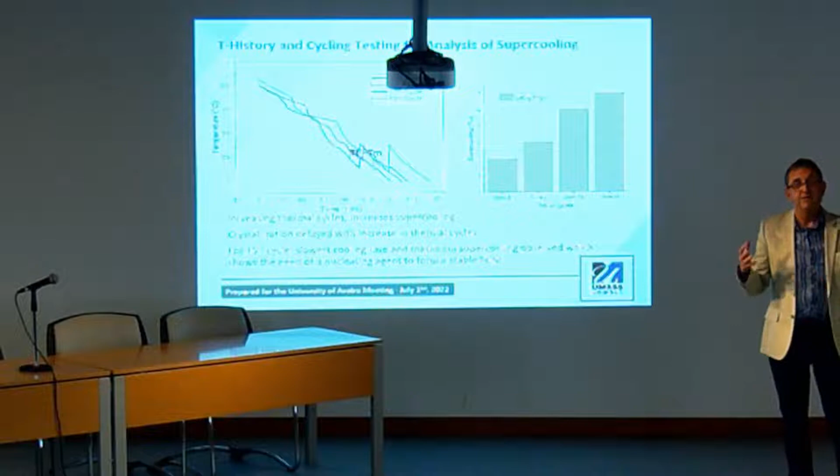Subcooling is something where we have to go to a temperature significantly lower than the initial temperature. We anticipate there will be a freezing temperature to make the material go back into solidified form. So you just go through those cycles and you have the whole story of the PCM. The important fact is that after 30 cycles or 50 cycles, we need to have material which is going like crazy, just one line. If you don't have this, this is something which shouldn't go to the market.

And I will give you just a couple examples of the formulation with calcium chloride hexahydrate, how we work on this and what we try to do. So actually, that material has a phase change temperature around 25 to 30 degrees, depending on the formulation. Latent heat is between 170 to 190 joules per gram. And we have been working with many different additives just to control subcooling, incongruent melting, and unstable operation after a number of cycles. So what we have here,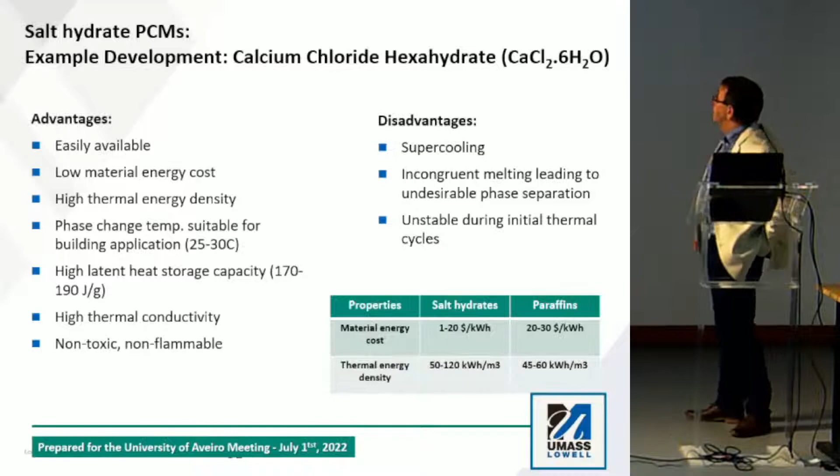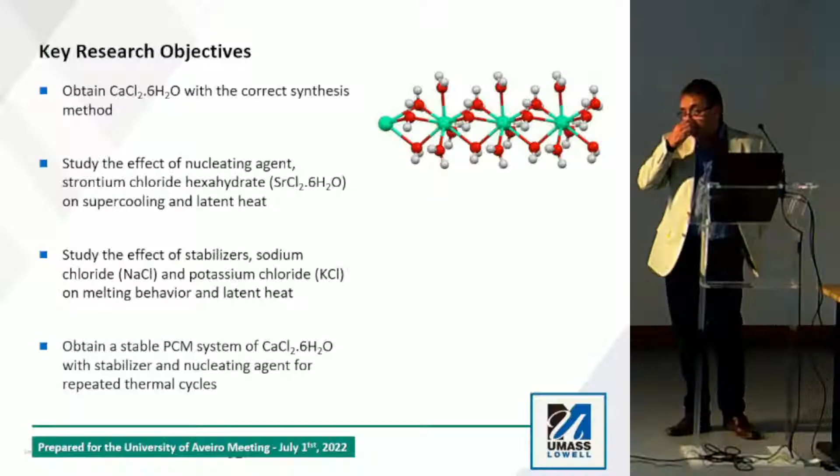material cost is between $1 to $20 per kilowatt hour, so we are within that $15 target. Paraffins are much higher cost. With thermal energy density, we talk about 50 to 120 kilowatt hours per cubic meter, and paraffins have much lower, 45 to 60. So this is just to compare the whole situation. Here's how it looks, the calcium chloride hexahydrate, and you can see this. This is like a powder.

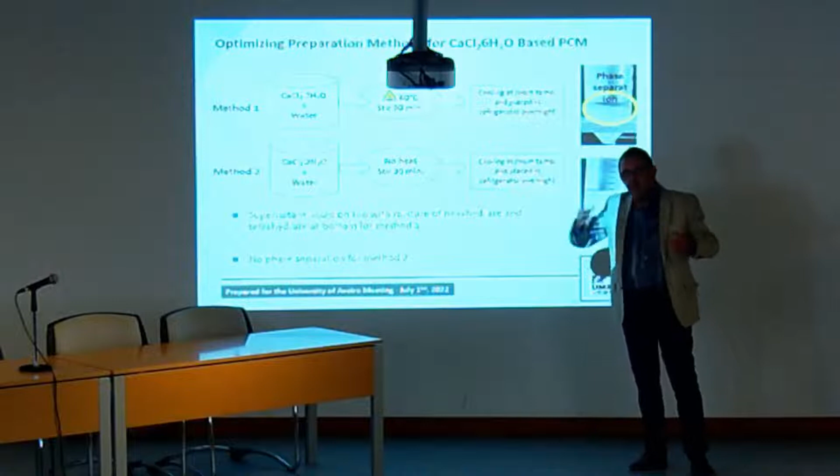There are several things you have to learn. We call this cooking PCMs, because this is mostly like cooking. You have to find a way to put together those components and make sure that you will have something which will mix together and work like one piece. Very often you end up with something which has phase separation, and there's no way to put them together. You can shake, you can warm up, it doesn't work too well. So there are several procedures you have to go through in the preparation. Then we do cycling.

And you could see that with the number of cycles, we ended up at cycle number 15 with tetrahydrate showing up. And we don't like that because this is the main enthalpy area we would like to have. That tetrahydrate makes the main enthalpy at this temperature region small, and then we have another big one. So we actually don't have enough capacity in the region we would like. The whole game is what to add to that PCM formulation to make sure everything is stable. I will not tell all the secrets, but I will show you an example that this is achievable.

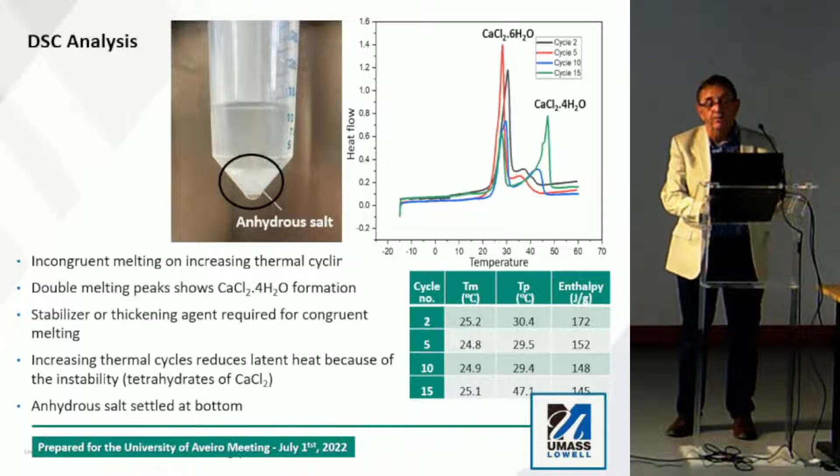So, for example, we played with different additives. You can see here strontium chloride hexahydrate, which also operates with temperature. It also works as a nucleation agent, and actually it helps. We see here that with different amounts of added strontium chloride hexahydrate, 2%, 3%, 5%, compared to the original without additives, we have subcooling reduced. But what's interesting, only 2% of the strontium chloride hexahydrate works well. The other amounts still come back with subcooling.

So you need to find that right cooking recipe, like a cook in a restaurant. Some people go by smell or taste. Here in designing PCMs, we have to go through a number of configurations. And there's another one: we need to use a stabilizer. We have 2% of the strontium chloride hexahydrate, and then we use potassium chloride, again at different percentages, and we look at how they behave through a number of cycles.

Another one is NaCl, sodium chloride. And we see that not everything works the same way, and sometimes we try to add 5%, and 5% is not any better than 2%. So this is the long story of formulation optimization; sometimes we don't go 2%, we go 2.5%, trying to optimize the formulation in great detail. And at the end, you have something like this. You have 25 cycles, and the chart looks beautiful, and supercooling is going down. This is exactly what we need.

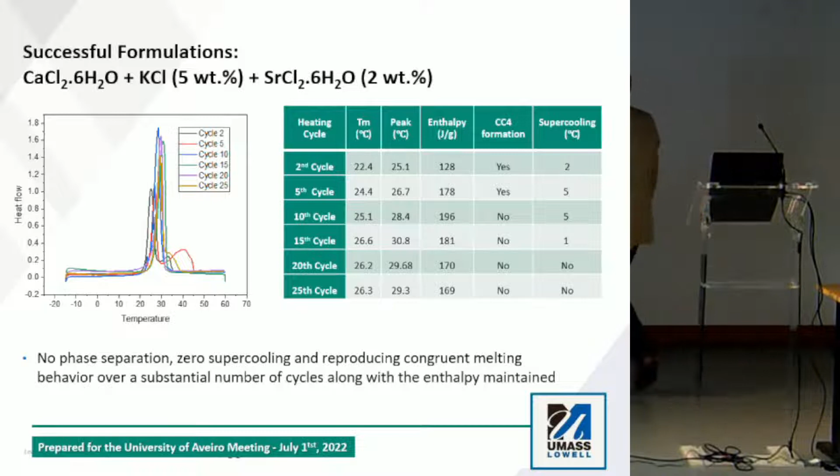Then we have another formulation with potassium chloride. Also, supercooling is going down. At the beginning, we have a little bit of extra hydrates showing, and then they disappear. That's the process, and it is a really long process for a single formula. You need a good chemical lab and a couple of dedicated chemists to work on this, and it is really time consuming. I have 2 PhD students working almost 24/7. That means even sometimes during weekends, they sit in the lab and do that work.

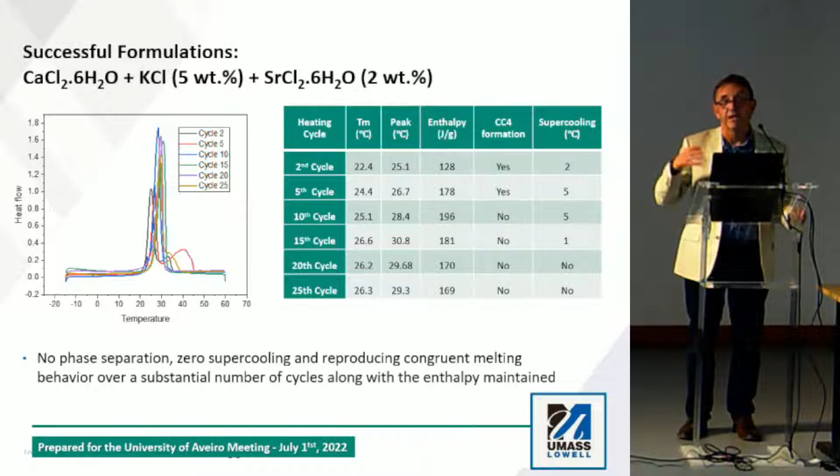And designers, I would like to say a little bit, it could be a separate class lecture, about how to design the PCM systems. Designing where to locate the PCM system is very important. And this is for designers, for modelers. The challenge: you need to be able to put together the computer model of that system, have knowledge of boundary conditions, and put material in different proportions.

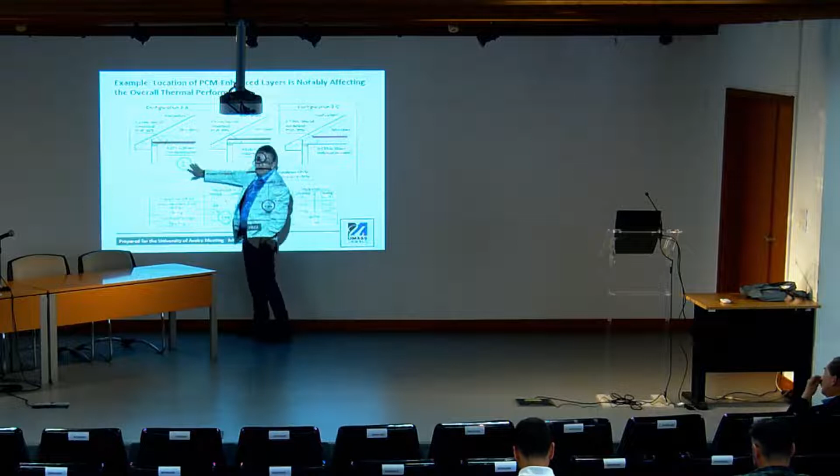And actually, you could see that this is about the energy savings, but in that configuration you have 0.7% of energy savings versus over 7% in this case. So there's a significant difference, and I didn't take the best performing and lowest performing. I just took 3 simple configurations to show you that you need to have good knowledge of the system and system characteristics to design the whole system.

Conclusions. So actually, I would like to go by the pictures more than the text which I show. So there is a substantial call for using thermal mass and phase change materials right now. For one reason, this is the time we are going through very serious challenges. Challenges with changing climate and challenges coming from extra dynamic loads in the whole industry. And in addition, we have right now a political challenge and war challenge.

The second thing, also related to the environment, is we can make sure that our designed systems with thermal storage can be much more energy efficient and much more durable and sustainable than industry promoted applications. Mostly I'm talking about lithium-based systems. So we can go much further on the environmental side with those applications.

And it's good to remember that inorganic PCMs are not just a challenge for engineers, but also they are a beauty because they are non-flammable. They have significant thermal storage capability if they are well designed, and also they are not that difficult to recycle. It's much easier to recycle salt than to recycle some organic chemical or lithium-based components.

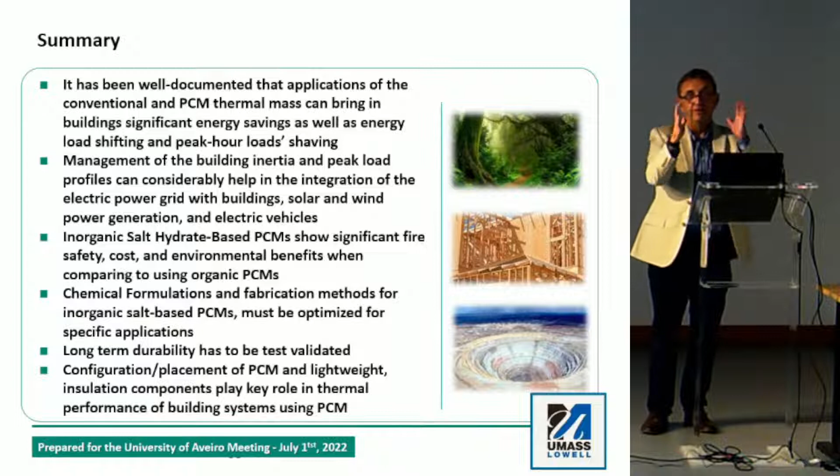And the last thing is about design of PCM systems. If you remember, I started the presentation today talking about a PCM. We cannot talk anymore about a PCM. In buildings, in military, I design batteries, I design buildings, I design many different applications, super powerful weapons, and everything has to be a special PCM crafted for that specific application. Also remember, there's not only PCM, this is a system which has to carry the PCM. So that's very important to remember.

Those pieces have to come together. If they come together, you will have a successful application. Without putting all those components together, forget it, you will end up in the whole situation which happened in Europe when PCM has been highly subsidized for 2 decades with zero success, I would say.

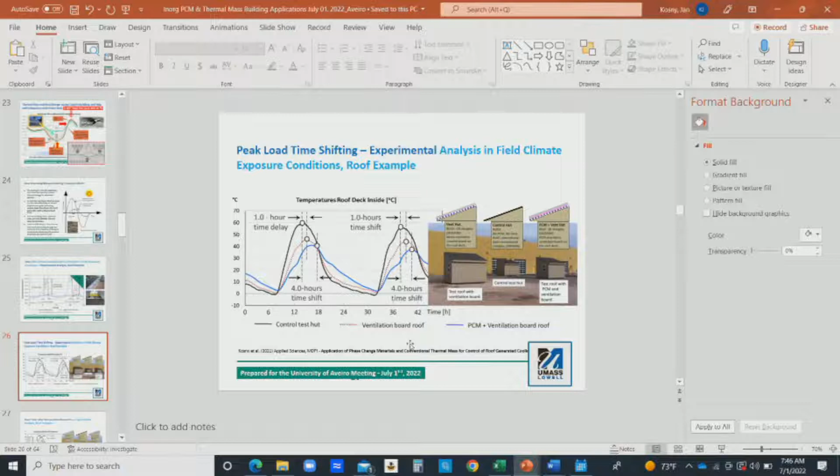How do we couple this, since we're talking about these single peak temperature PCMs, and how do we work this out? If we're talking about long processes in terms of building amplitude or oscillation temperatures, how do we work with the thermal inertia so the PCM is more effective? Because we see these applications sometimes come into play, do their job, and it's very instantaneous.

That's a very good example. If you put PCM just under the roof surface, within 5 minutes the PCM will be charged and there's no PCM anymore - that's over. So actually this is an example with the roof application here.

This is a metal roof on top. Between the metal roof and the PCM system, you have air cavity, reflective insulation, fiberglass, and then PCM. So your thermal load from the roof goes down. You still have the harmonic thing, but there's enough reduction to make sure the PCM takes care of it. Depends on how much PCM you have to get to the design where the PCM will be capable of absorbing enough energy.

So it has to be compatible with the energy storage density for the PCM. Here, I haven't added any extra insulation - I just moved the insulation to the right place and moved the PCM to the right place. So as a rule of thumb, if I had to think about building components, I'd say if I had to put PCMs on floors, I'd put them on the most inner surface. For walls, maybe also the most inner surface. For roofs, maybe not the inner surface, but somewhere in between. But you have to ask yourself if you can afford putting PCM in all walls, roof, and floor.

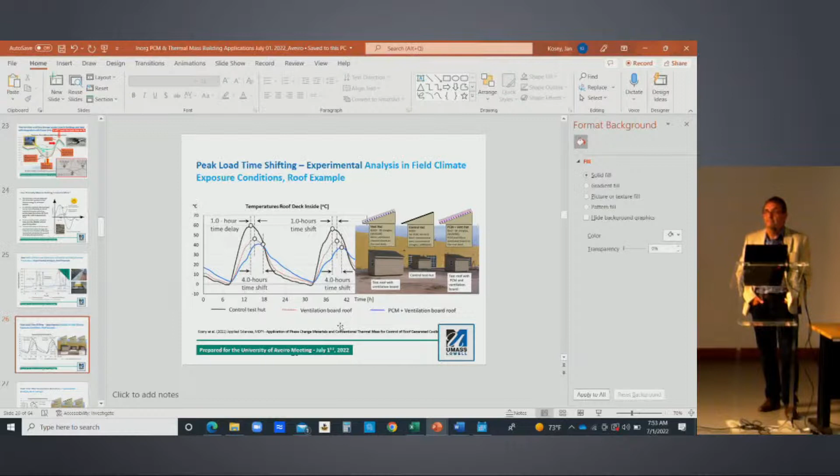I'm not a specialist in the field, but I am curious about it mainly, and I have a few comments considering the importance of energy consumption in houses in the US that you presented. I wonder if that importance is not mainly related to cooling needs in general, globally, instead of heating needs. At least here in our conditions, we have important cooling energy needs for buildings.

In fact, our traditional construction in Portugal, stone construction with very wide walls, was conceived for keeping the inside temperature always quite cool, and people would use mainly wood for heating when needed. But the building itself was conceived for keeping a fresh indoor space. For those conditions I'm referring to, the cooling needs of houses, do PCMs offer some benefit or not so much?